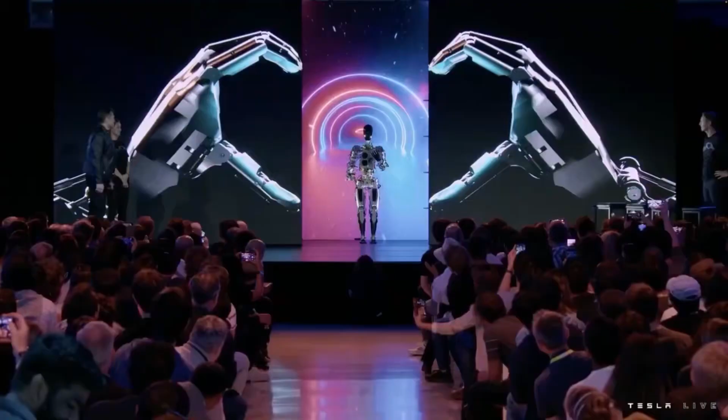Elon Musk was not shy about making bold claims on the capabilities of his Tesla bot humanoid robot, chief among them being his belief that an economy driven by worker droids will make possible a future where there is no poverty among humans, a world of abundance where everyone can have everything that they want in terms of products and services. This would be a fundamental transformation of civilization as we know it, and I think we can all agree that it would be a change in a positive direction.

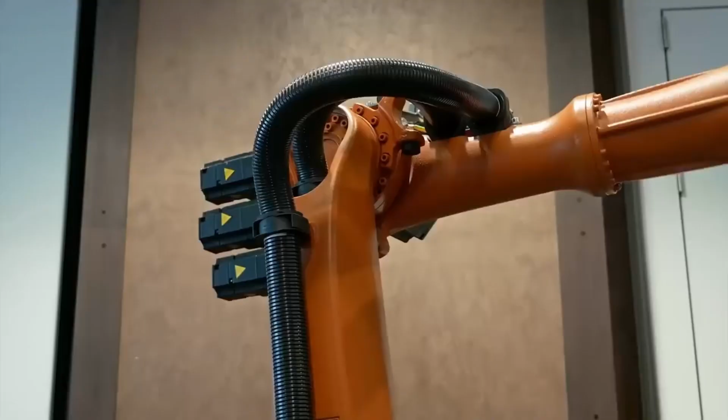The basic theory underlying this idea is that the size of the economy is determined by the number of productive entities multiplied by their productivity. So, in order for the economy to grow perpetually, we would require an equivalent growth in productivity. Humans have limitations on productivity and reproduction that robots don't suffer from. So, if productivity is limitless, then the economy, by extension, will be as well.

That sounds like very wishful thinking, and it is. But Tesla is starting on the path towards that goal regardless. So let's talk about how the Tesla bot is going to accomplish the most ambitious plan in history.

Tesla AI Day 2022 brought us our first look at the functional Tesla bot. Well, two of them, really, or like 1.5. We did see a robot walk across the stage and do a little dance, but it was kinda janky looking. Tesla confirmed that this is simply their test candidate. They built a functional human-shaped robot with commonly available parts as quickly as possible so that they would have a vehicle to start developing and testing their software.

The first prototype was nicknamed Bumble C, another Transformers reference, and an admission that this is not even a B-grade robot. It's a firm C. But this gives them something to work with while they put their effort into the real deal.

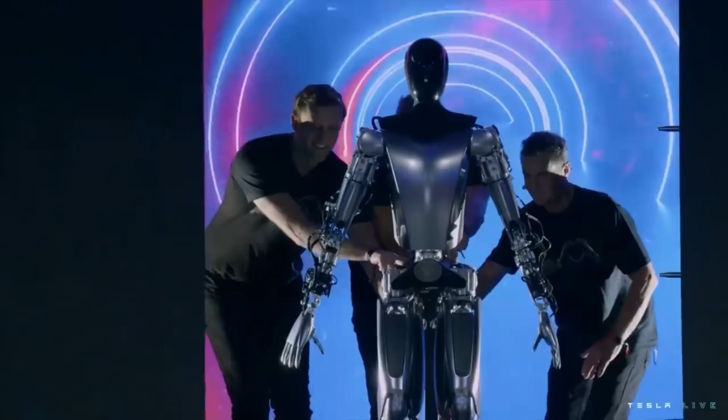We got a taste of the real Optimus at AI Day. It couldn't walk or barely even stand on its own and had very limited movement. But this one looked a lot better, and Elon confirmed that this is pretty close to what the first production robot will look like. So, the ultra-slender design from the very first AI concept is gone. This new Optimus is chunky, and that's perfectly fine.

It always seemed unlikely that Tesla could fit a functional robot into such a slim frame. I think with the first bot concept, they were trying to stress the fact that this was not supposed to be dangerous or intimidating. Every aspect of the Tesla bot is designed for optimized cost and efficiency. That means reducing the part count and power consumption down to its bare minimum.

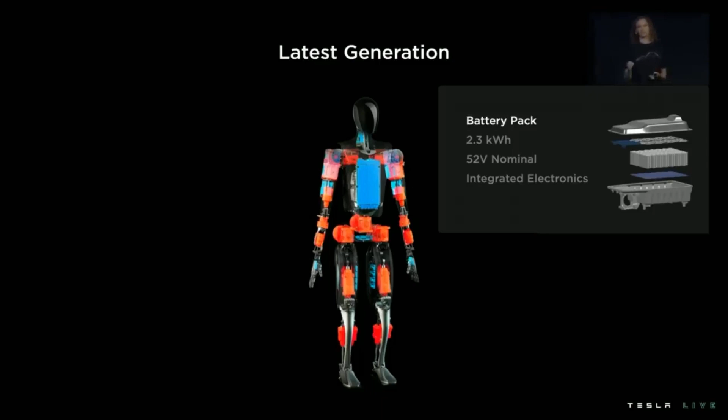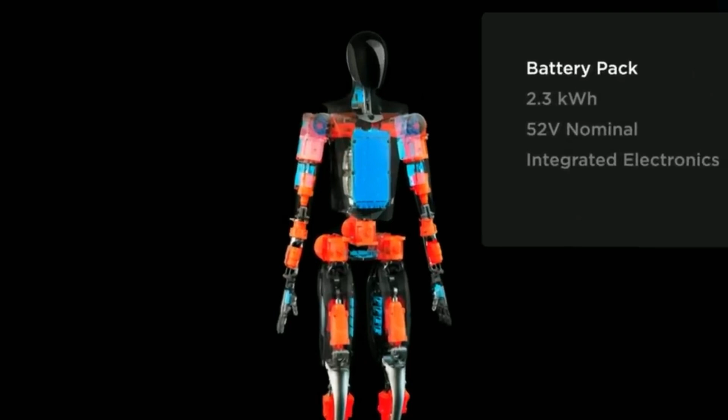The power source for the bot is a 2.3 kilowatt hour Tesla battery pack, which is enough energy for a full day of activity. This is a fully integrated battery unit, so power distribution, cooling, and battery management are all integrated into the pack. This keeps the bulk of the weight right in the middle of the robot. Tesla is leveraging their existing products and supply chain to build this miniature battery pack.

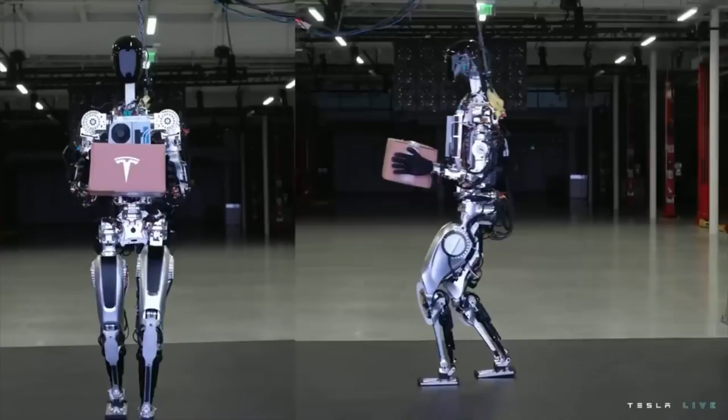The central computer is also located in the torso, the brain is in the chest, not the head, and again, that's to centralize the weight. This is powered by Tesla's FSD computer, the same one that is in every Tesla vehicle with a few minor changes to form factor and functionality, but this computer is already designed to do everything that a human brain does. That's how it drives a car, processing vision data and making split-second decisions based on multiple sensor inputs.

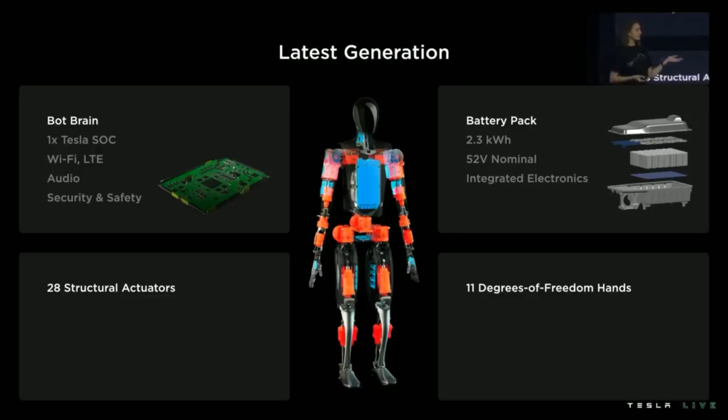The updated bot design uses 28 structural actuators, which is actually down from the original concept last year that had an estimated 40 actuators. Most of the movements were simply inspired by nature. The knee joint of the Tesla bot is a copy of a human knee joint. The bot hands use mechanical spring-loaded tendons, the same as our own hands use muscle tendons. Nature has done a pretty good job of optimizing us over millions of years of evolution. So if it ain't broke, don't fix it. The engineers stressed many times that the priority here is to make a robot that can be manufactured cheaply and quickly.

So they don't have the luxury of using exotic materials like carbon fiber and titanium. The bot has to be sturdy enough with mostly plastic and aluminum parts. So they have to keep energy exertion at a minimum and reduce mechanical stress wherever possible.

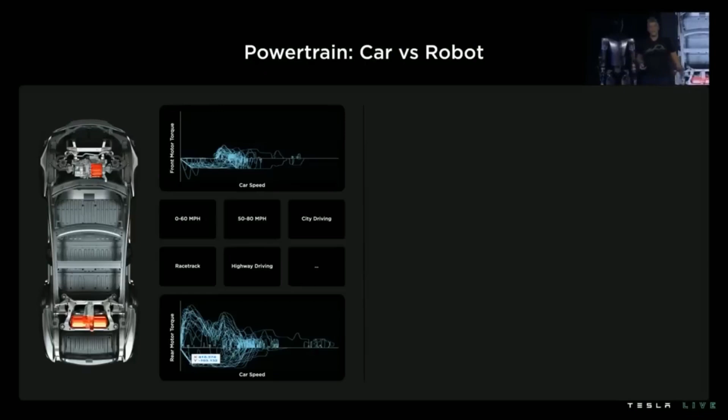Because of this, we'll never see a Tesla bot doing backflips. It's going to appear very boring. It does not have to be extraordinary, but it does have to be useful and functional with a design that can be built in a factory at high volumes.

What Optimus lacks in athletic ability, it will more than make up for with intelligence and versatility. And that's where the Tesla bot starts to pull away from the competition. As Elon said, other humanoid robots are missing a brain. They may be able to do parkour, but they cannot navigate the world autonomously.

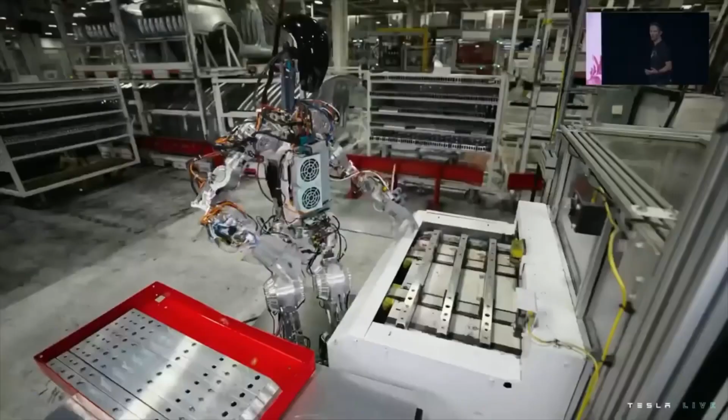All humanoid robots so far have been very expensive and therefore only produced at low volume. Optimus has lower capability, but that allows for higher volume, and that means the price will come down. Elon puts the cost of a Tesla bot at around $20,000 US.

So that's the real key takeaway from all of this. The robot demonstration is just eye candy, but there's not much substance to that right now. We've all seen walking robots before. It's not really a big deal.

But the idea that you could own your very own walking robot, it would come with the ability to operate independently, to use tools and complete tasks, and do useful things that you ask it to do for just 20 grand? It's not a small amount of money, but we have to remember that productivity is equal to money.

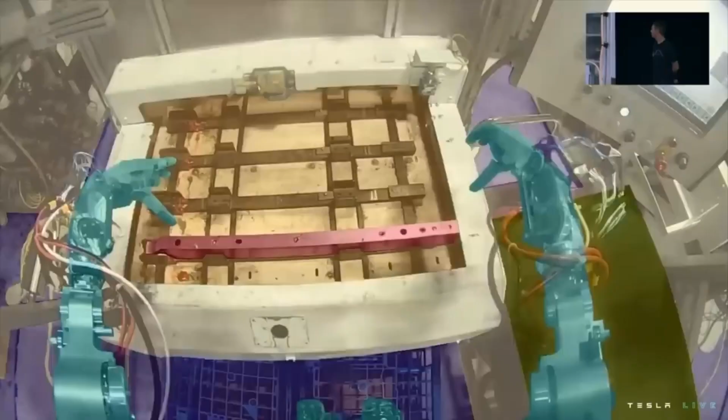And just think about how much more productive you could be if you had this robot helping you out in your day-to-day life. Could a Tesla bot actually turn a profit in the long run? I mean, I don't see why not. So it's also an investment, not just an expense.

The key to the Tesla bot's usefulness is its brain. Again, this is the same computer brain that goes in every Tesla vehicle and allows the car to drive semi-autonomously. At the moment, with FSD beta, the car can drive itself through pretty much any situation. Maybe not perfectly, but it's getting there.

So the car itself is already a robot with an artificial intelligence that navigates with computer vision. That aspect of autopilot ported over directly to the bot. The biggest changes that were required came with the transition from wheels to legs.

There are a couple of factors that a walking robot needs to deal with that the car does not, and that's things like step placement and balance. These are difficult and something that the team is still working on.

They're currently using the autopilot simulator to train the bot's locomotion planner. They are also taking motion capture data from real people and then mapping those keyframes over to the bot and training it on real human movement. Now, this is going to take a while.

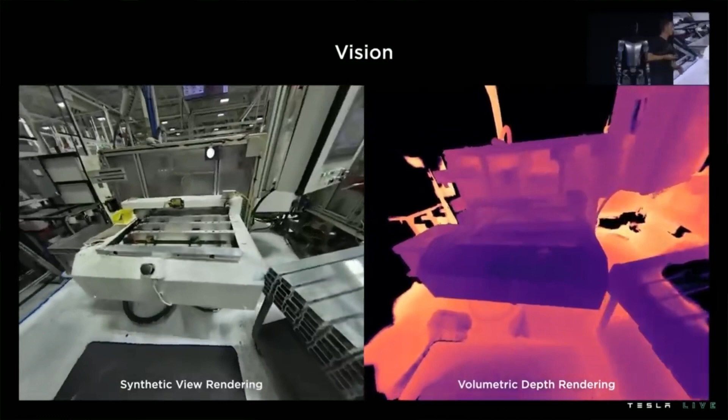What is working very well on the Tesla bot is the computer vision system. Tesla showed us how the bot uses 3 cameras to navigate the world and complete simple tasks. So just like the Tesla vehicle, the FSD computer in the bot is taking camera input and converting that into a 3-dimensional digital rendering made up of voxels.

Those are 3-dimensional pixels, and then navigating through the digital world. The computer can accurately judge distance, size, and velocity just by counting voxels. Another layer to the vision system is object recognition.

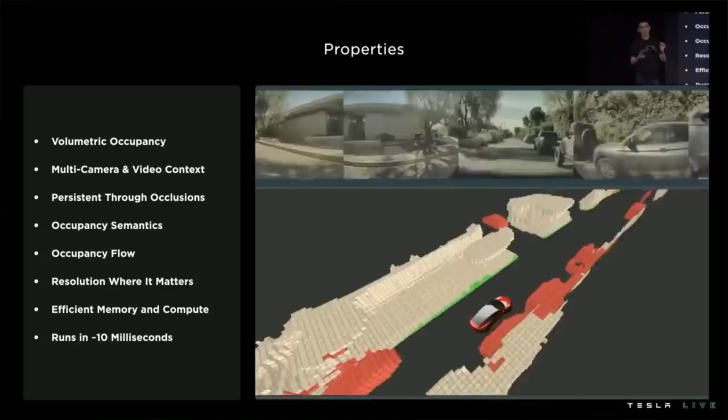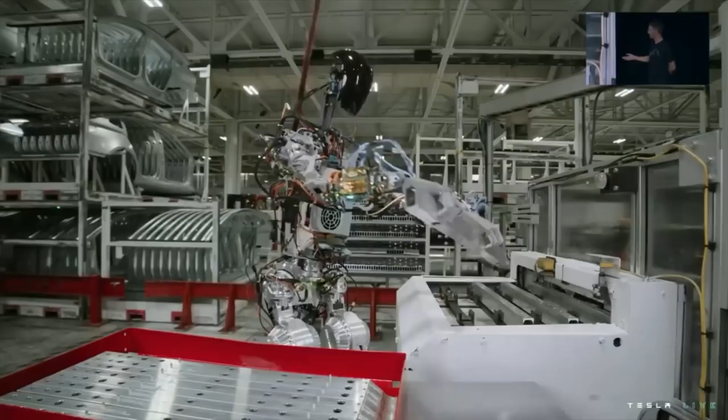So in a car, the FSD computer has the advantage of GPS. This shows the car exactly where the road is, and it knows what paths are available to drive on. Trying to navigate through an interior space, there is no set path. So the bot has to be able to improvise and find its own way through an environment. It does this by detecting edges and high-frequency patterns, and it knows that the spaces in between the edges is where it will be safe to walk.

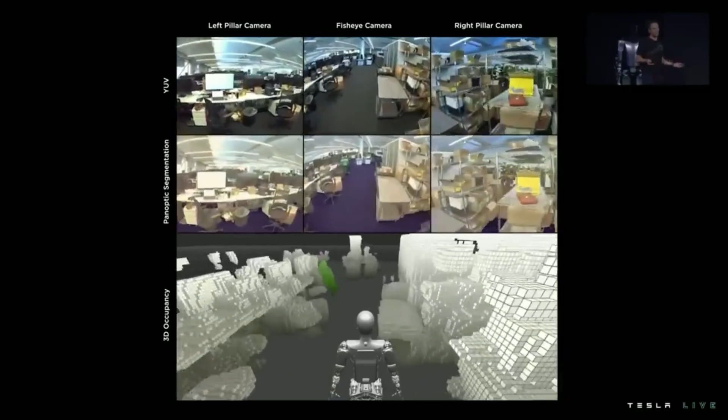So, how does this all come back to ending poverty and giving every person unlimited wealth? Well, we just need to think about the number of bots multiplied by their productivity. This is why Elon and his team are stressing that Optimus is designed to be cheap and easy to build.

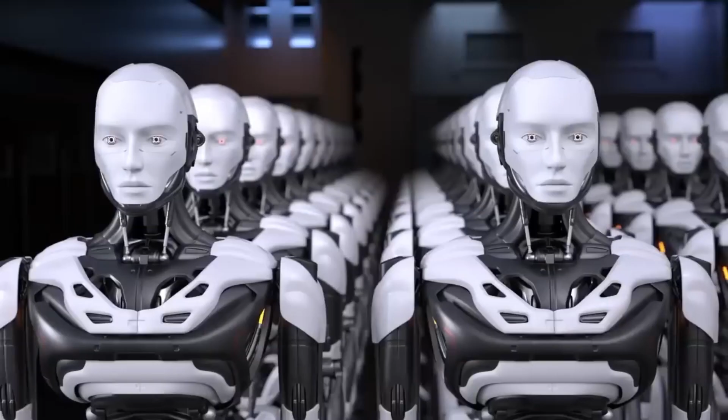The goal here is to make a useful humanoid robot as quickly as possible, designed for manufacturing at high volume with a low cost and high degree of reliability. Elon is talking about building these robots by the millions, eventually at a higher volume than Tesla vehicles,

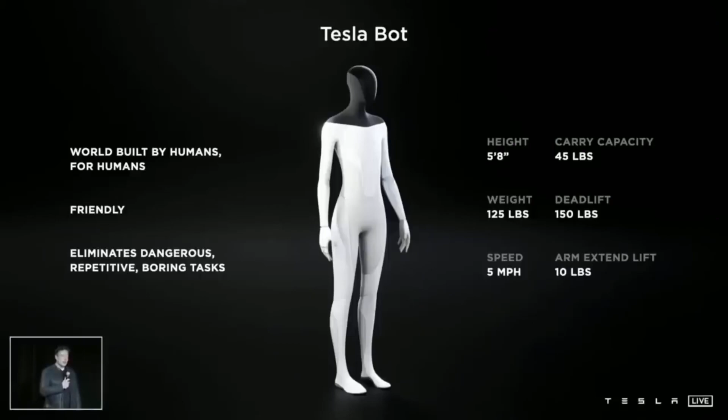which are reaching into several million units per year and rising fast. So there are going to be a lot of robots, more than enough. And when we just multiply that very high number by the productivity of a robot, that is yet to be realized, but when you think about it, you have a droid that is purpose-built to do work, complete tasks that are boring, repetitive, and dangerous.

They don't need to be programmed or remote controlled. You just tell them what to do and send them on their way. The bot will function autonomously, and it will work until it either finishes the task or the battery runs out.

Elon theorized that self-driving cars can improve the productivity of transportation by 1 order of magnitude. Elon is thinking that the Tesla bot can offer an improvement to the economic output by 2 orders of magnitude. The United States GDP in 2020 was just over $20 trillion.

So 1 order of magnitude would increase that to $200 trillion. A second order of magnitude would be $2,000 trillion. So this is the calculation that Elon is basing his future utopia of unlimited wealth and abundance.

And if his math is correct and his robot lives up to the hype, then yeah, he's totally right. There would be more capital than anyone would know what to do with. In reality, we have no idea what effect that might have on the economy or the global standard of living. But it's probably worth finding out, and it looks like we will.

Elon stresses that this fundamental change needs to be done the right way, carefully and safely, to make sure that the outcome is beneficial to civilization and the outcome that humanity actually wants.

Elon also followed up this talk with a Twitter exchange where he acknowledged that even if the Tesla bot can make life better in the long term, we still have a lot of very hard work to do in the short term. This does not happen overnight, but it could happen someday. The wheels are in motion.

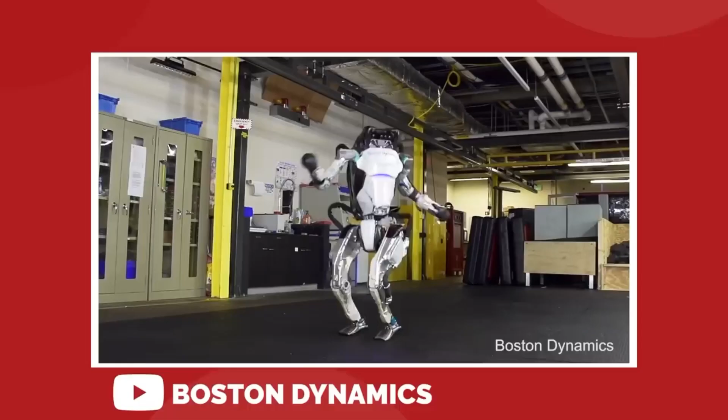All we can really say definitively is that this technology is going to be very interesting to watch over the next 5 to 10 years. That's when we are really, truly going to see what AI-driven autonomous robots can achieve. And that's something to look forward to.

There are so many technologies in our world that have kind of plateaued. Try and remember the last time you got really excited by a new smartphone or device. Electric cars have kind of leveled off as well. We're not seeing big breakthroughs or game-changing new tech.

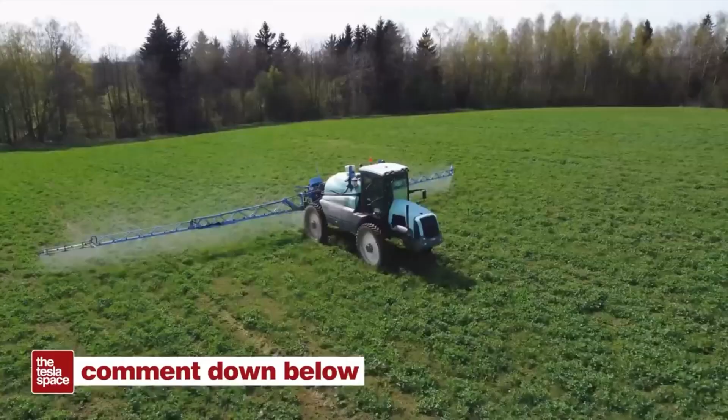But the world of AI and robotics is just getting started. This is where the action is going to happen in the next decade, and we're pretty excited to see where things go. What do you expect we're going to see, though?

Is the Tesla bot the secret to unlimited wealth, or is this all a techno pipe dream? Drop your thoughts down below.